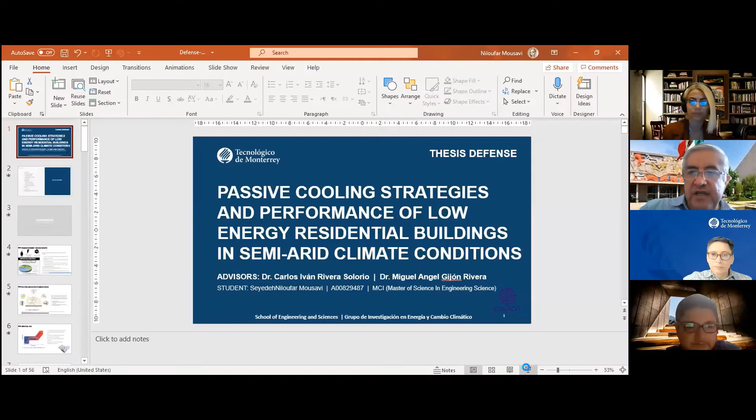Thank you, Doctor, for the introduction, and thank you everyone for joining our committee and giving me your precious time. I'm presenting my thesis defense for Master of Science in Engineering, MCI, at Tec de Monterrey. I would like to thank my advisors, Dr. Carlos Rivera and Dr. Miguel Gijón, for their guidance during these two years, and also Conacyt for supporting us. My thesis is about passive cooling strategies and performance of low energy residential buildings in semi-arid climate conditions.

In short, here is how we will present: first the introduction, covering the problem we face in this industry and what we want to solve. Then a brief literature review of previous works, the research opportunities and gaps found, and the objective of this thesis. Next is the methodology, including the general work plan, how we validated our simulation, and our case studies. Finally, we move into results, conclusions, and recommendations for future work.

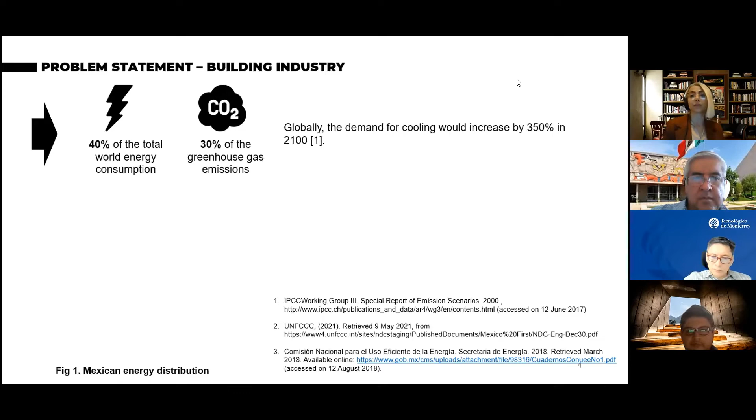In the introduction, I'd like to state the problem in the building industry. Globally, the building industry is responsible for 40% of total energy consumption and 30% of greenhouse gas emissions, due to both construction and consumption in buildings. Worse, this demand is projected to increase by 350% by 2100, because global warming will drive higher demand for cooling, making this problem even worse.

In the Mexican context, buildings are responsible for almost 20% of energy consumption, and out of that, almost half, 44%, is due to cooling. Another factor is that under the Paris Agreement, Mexico signed a goal to decrease greenhouse gas emissions by 22% and black carbon emissions by 51% by 2030. That's why reducing carbon impact and energy use is important across all industries, especially in building, which has a big portion of the impact.

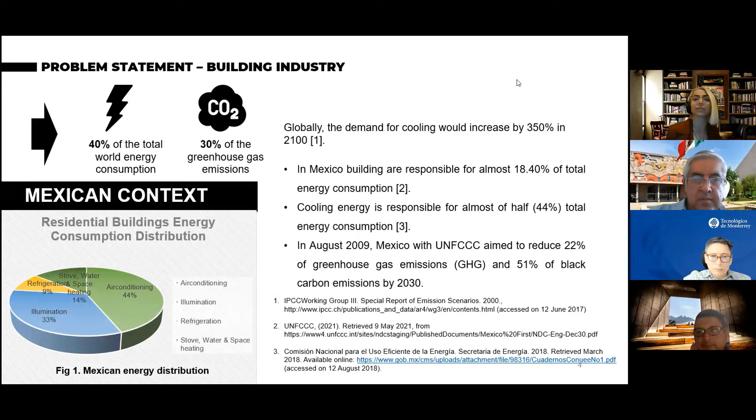Throughout history, there have been many passive cooling solutions that reduce the need for mechanical ventilation and electricity. One pioneer is the Passive House Association, which has suggestions and rules for different kinds of buildings. But passive cooling is very climate sensitive, so there isn't one strategy that applies to all; it needs to be studied in different climates.

Some solutions from Passive House include applying thermal insulation, certain types of window glazing that protect interior spaces, and airtightness. Other examples include reflective paint, thermal energy storage materials like PCM, insulation, glazing, and external shading.

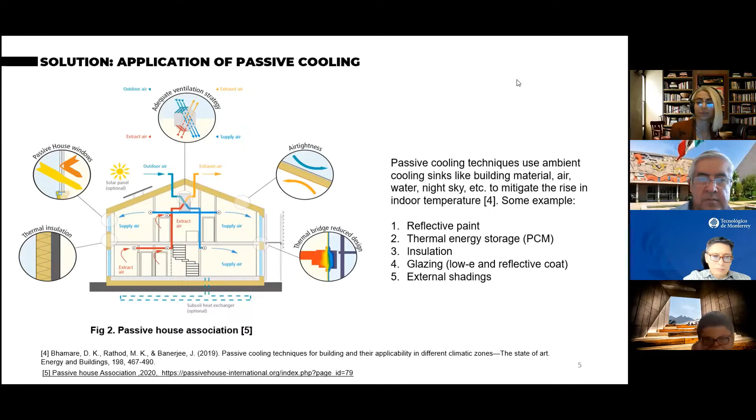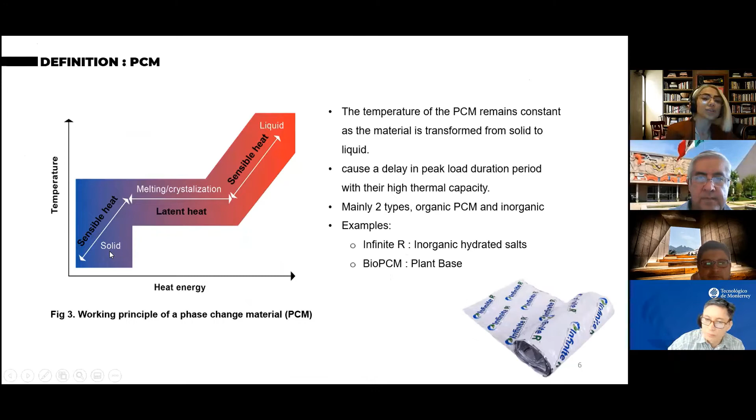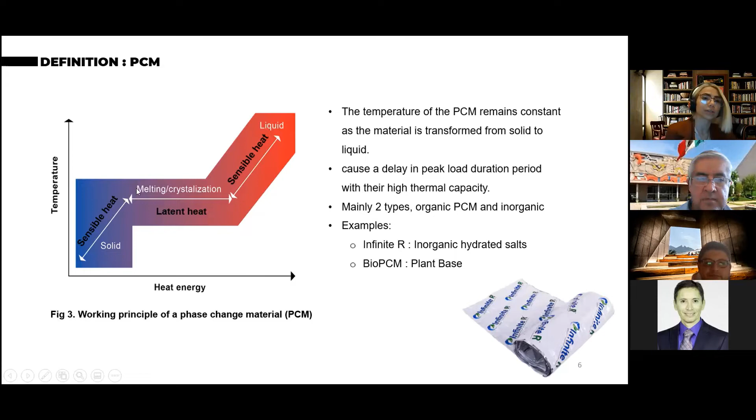To define some of the more advanced materials used for passive cooling, the first is PCM, a phase change material that keeps temperature constant between two states, transitioning from solid to liquid. As shown in figure 3, while temperature increases, it remains in solid form with sensible heat, but once it reaches its melting point, due to its latent heat, there's a larger energy gap before it starts changing state from solid to liquid.

Once the outside temperature reaches its melting point, the material starts to liquify, and when the temperature drops below the melting point, it starts to solidify and crystallize again. This creates a cycle that delays the peak load hours—for example, if the hottest hour is 3 p.m., it becomes 4 p.m.

In those spaces, there are generally two kinds of PCM: some are organic and some are inorganic. If I want to talk about the industrial ones available in the market, there are two main brands: Infinite R and BioPCM, where Infinite R is inorganic salt hydrate and BioPCM is plant-based.

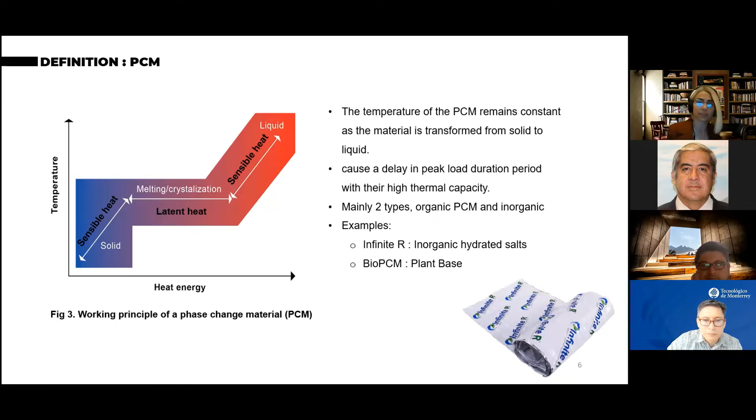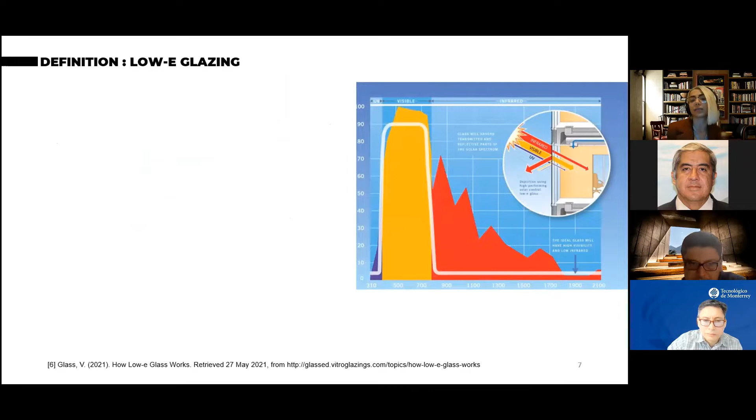Infinite R is right now more available in Mexico. Another new kind of technology is in glazing, which is low E. We know that generally there are three types of radiation: solar radiation, UV, visible, and infrared. Out of that, we don't want the UV and infrared, but we need the visible light to come in. So what low E glazing does is decrease the amount of radiation from UV and infrared, but allows the visible radiation in.

As you can see in the figure on the right, during a summer day, usually the low E glazing is applied in a double or triple kind of glazing. In double glazing, it's on the inner side of the surface, and on the outside. So once in the daytime it receives the solar radiation, it will reflect the ultraviolet and infrared, while allowing the visible light to pass through.

And during winter, what it does is it doesn't allow the heat inside the house to go outside, so it reflects it back inside, keeping the house warmer in winter and keeping the house cooler in summer.

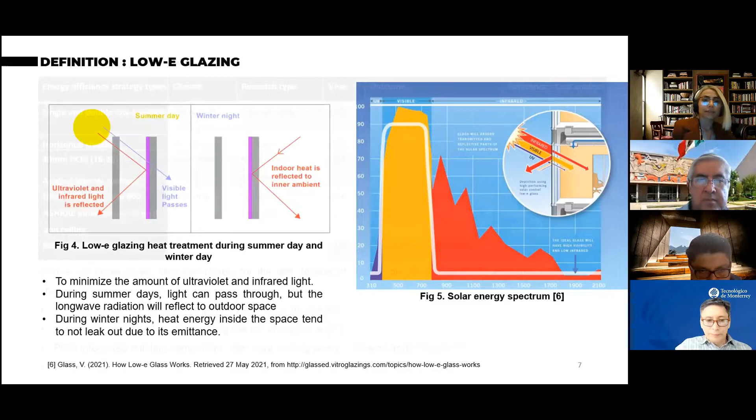Some of the literature review that we did, we studied more than 70 papers, but there is a short summary of a few examples of different strategies that were applied in similar climates, which is hot and warm, because they have been studied in different kinds of climates. They have used different methods, whether simulation or experimental.

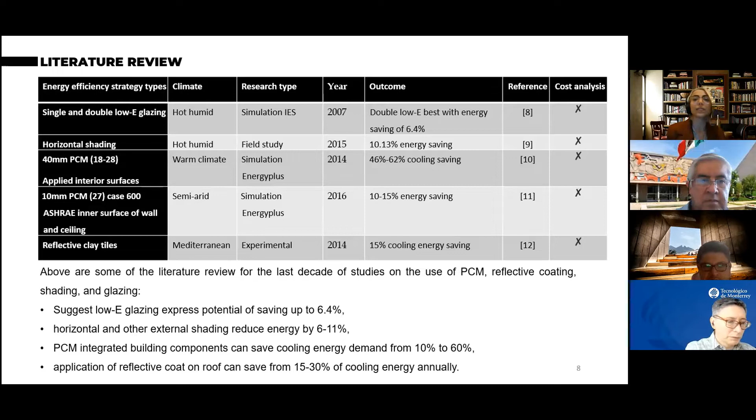One thing that they had in common is how much energy they saved, or cooling energy they saved. For example, by applying low E glazing, they found there could be a 6.4% energy saving in the building, or by applying shading, 10% energy saving. Something they were missing is there was no cost analysis on how much they save based on cost.

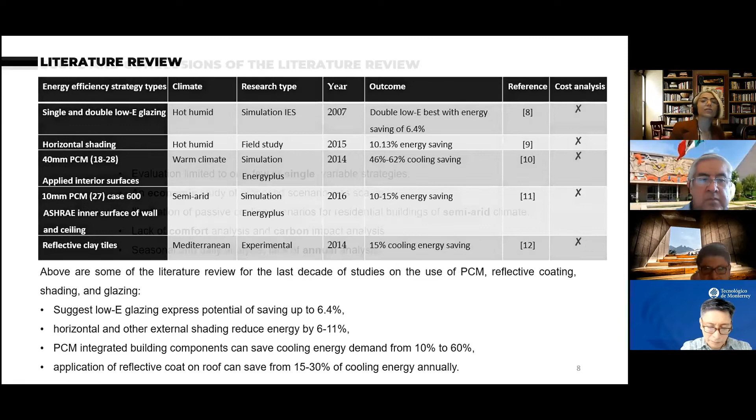Then we come to a conclusion on the gaps and things that were missing in all those studies. One of them is that they are mostly limited to single or a few kinds of scenarios, for example only low E glazing, or low E and reflective, but they don't combine the scenarios to see the impact of how it will affect the building.

Also, one thing that was missing was the economical study, which I think is very important. We know all the passive strategies, but they're not applied, because for the investors and users it's very important to understand the economic benefit for them, how much of the cost they can return and how much they can earn from this investment. So this was the important thing we think is missing and we can do about it.

Also, we saw that it's very climate sensitive, and passive cooling in semi-arid climate was missing. Also in all those studies, they either call energy reduction or just cooling energy reduction, but there is a lack in analyzing the comfort analysis - how it impacts comfort for occupants, or how much carbon they will reduce.

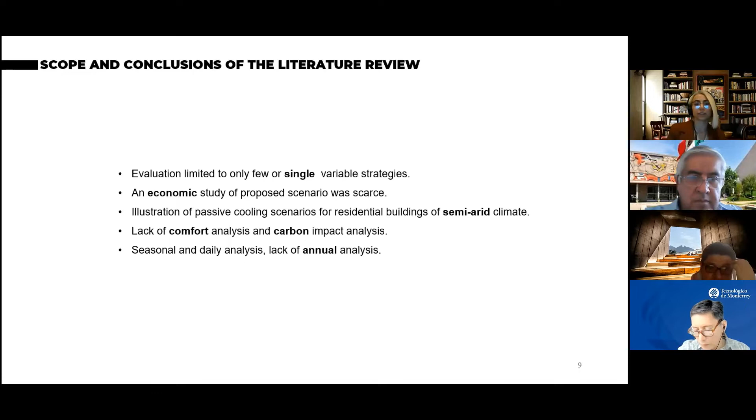Another thing is that some of them are seasonal analysis, meaning they only analyze heating or cooling energy, whereas if they don't do an annual analysis, sometimes there may be a decrease in energy consumption during summer, but in winter it increases energy consumption, and then the strategy is not applicable. So that's why we think it needs to be annual strategies - those are the gaps we want to cover in our thesis.

So the main objective of our thesis is to assist building developers and authorities with the economical and environmental impact of applying energy efficient configurations for passive cooling in residential houses in Mexico, which also provide thermal comfort for residents, and are cost effective, which is very important. We also want to assess the thermal performance and carbon footprint of these scenarios.

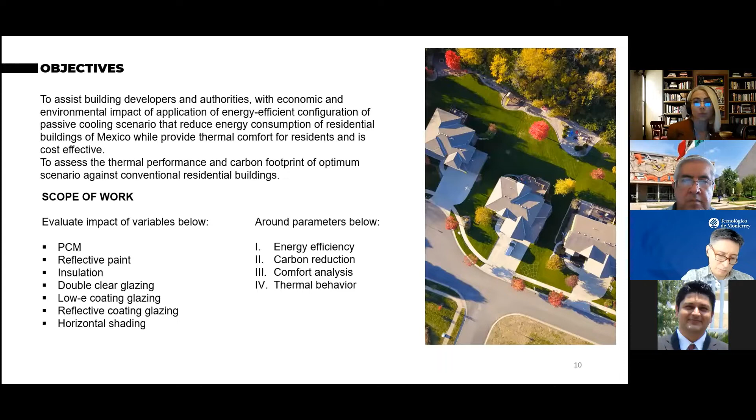The scope of this work, with regard to the literature we reviewed and the strategies available in Mexico, selected variables including PCM, reflective paint, insulation, double clear glazing, low-E coating glazing, reflective coating, and horizontal shading. We wanted to analyze these variables around energy efficiency, carbon reduction, comfort analysis, and thermal behavior. The methodology used in this study is mostly numerical through simulation, but we also tried to validate it through experimental methods.

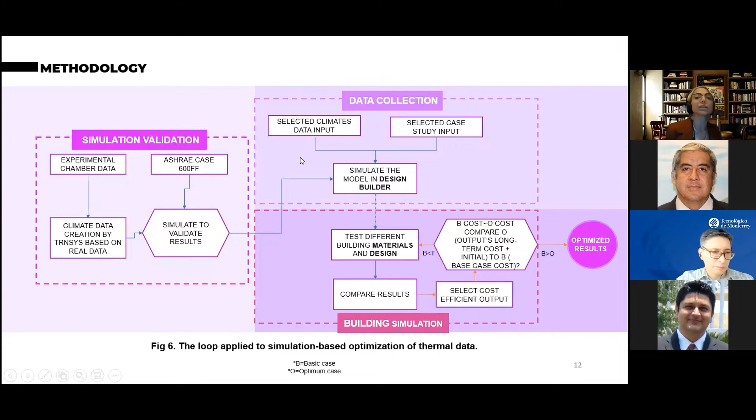In summary, we have three main stages. The first is data collection, where we want to select the most important climates within Mexico, and also find the common houses and select case studies. But in parallel, before simulating those buildings, we want to understand whether our simulation is verified.

We selected two types of validation: one through the benchmark ASHRAE case 600FF, and another through an experimental chamber we had near Tec, where we tried to re-simulate the real data and the benchmark.

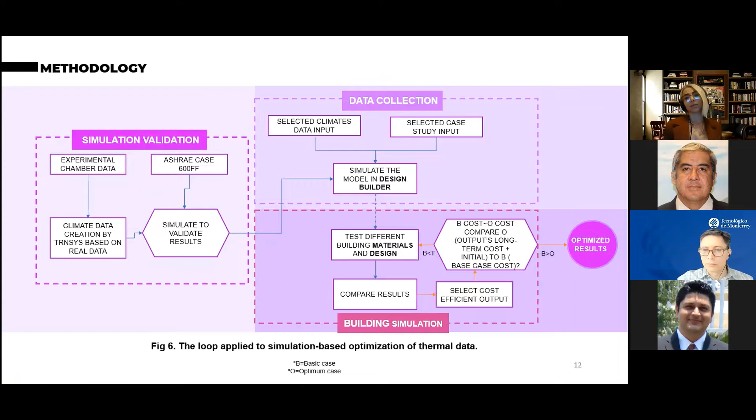Once we saw that our results and the other results synced and were verified, we simulated our case studies in Design Builder as a base case, then tried different scenarios for the materials mentioned above, comparing results in terms of cost and energy. If the cost and energy of the base case was more than the optimum case, we would resimulate until we got the optimum result.

The main software used in this research was Design Builder with EnergyPlus simulation, to understand the energy, comfort, and thermal performance.

For us to resimulate the weather data for the experimental chamber, we needed to use TRNSYS, because the data we collected was global and we needed to have diffuse and direct radiation. We used TRNSYS to analyze that.

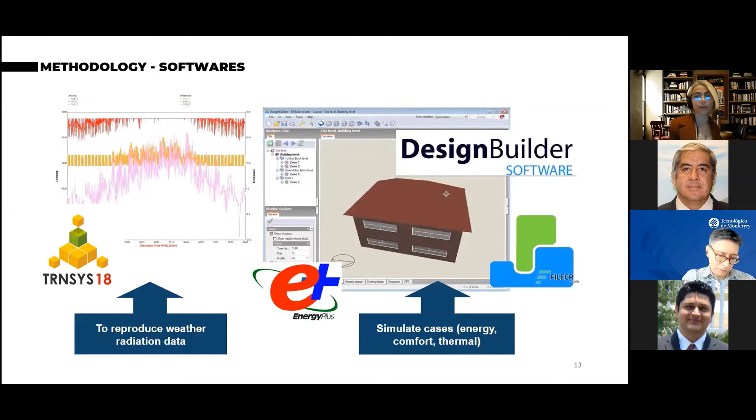Our first validation was through the 600FF, which is the BESTEST ASHRAE free-float test case. This was a very simple geometry, a 6 by 8 meter square house with 2 windows. We compared the maximum, minimum, and average temperature in the year, and had an error rate of almost zero, only 1%, which was verified through this benchmark.

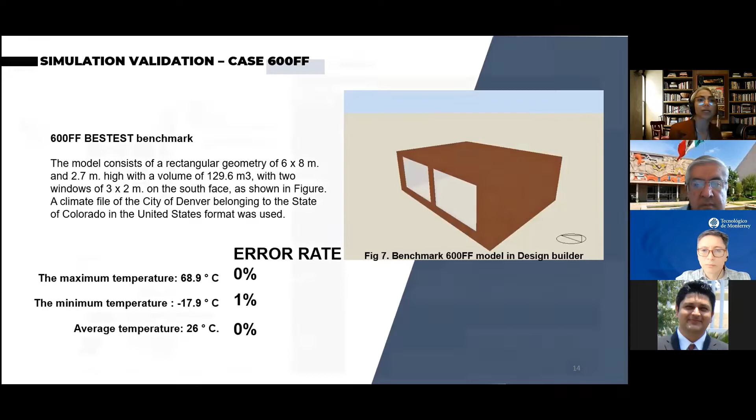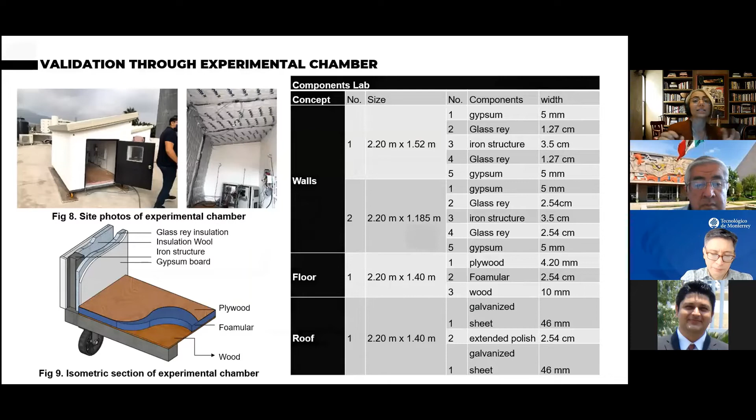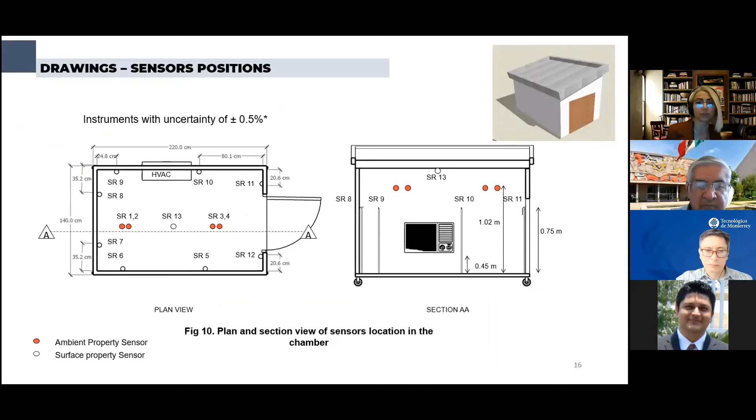Then we moved on to simulating the real data from our experimental chamber, a small unit near Tec, 2.2 by 1.4 meters square. We had sensors inside, and also a weather station to record the weather data, including ambient temperature, humidity, and surface temperature. We then tried to simulate that chamber and compare our results.

For the error, we used root mean square error and root mean square percentage error, based on which we only had 1% error. This was allowed because our Davis equipment used for the weather data had an error rate of plus or minus 0.5%. So 1% was acceptable, and we confirmed our simulation methodology.

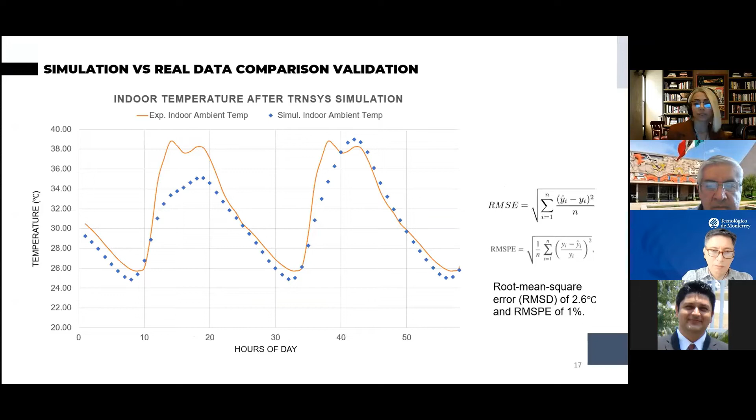The first step was selecting the climate. We looked at which states of Mexico have the highest cooling energy consumption, and saw that Nuevo León is number 2, one of the highest in terms of cooling energy consumption. That's why we selected Nuevo León.

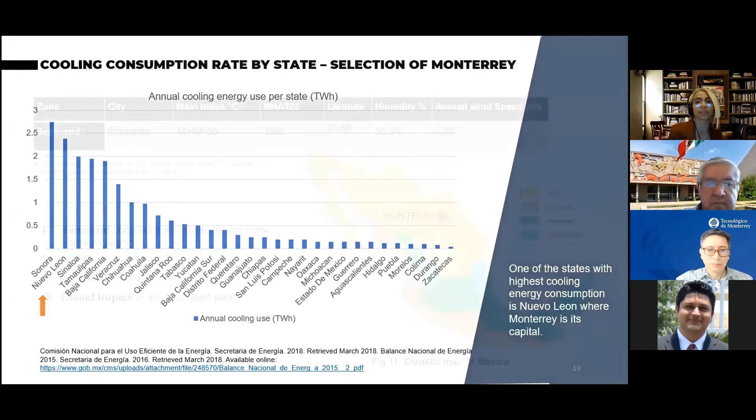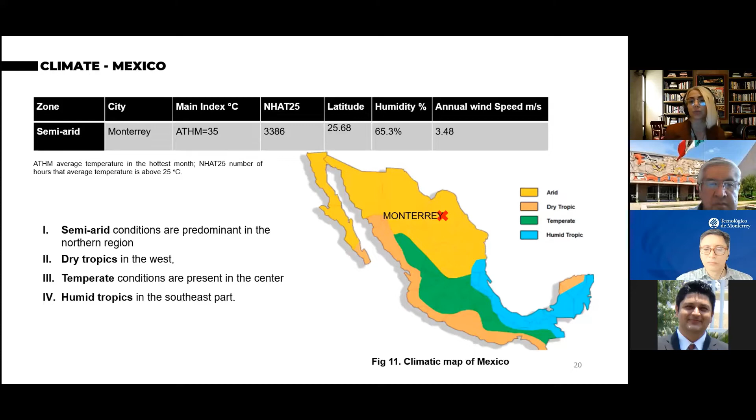We then analyzed its impact. Mexico has a few main climates, 4 main ones. Monterrey is in a semi-arid climate, while most of Mexico has an arid climate. Monterrey's average temperature for the hottest months is 35 degrees, and the number of hours the temperature is above 25 degrees is 3,386, almost half the year. The latitude is 25, humidity level is 65%, and average air speed is 3.4.

After selecting our climate, we wanted to find the common residential houses in Mexico. We went to the RUV website, a Mexican housing government body, to see how they classify residential units. We saw that they classify units based on people's annual average wage, and we also looked at the housing classes.

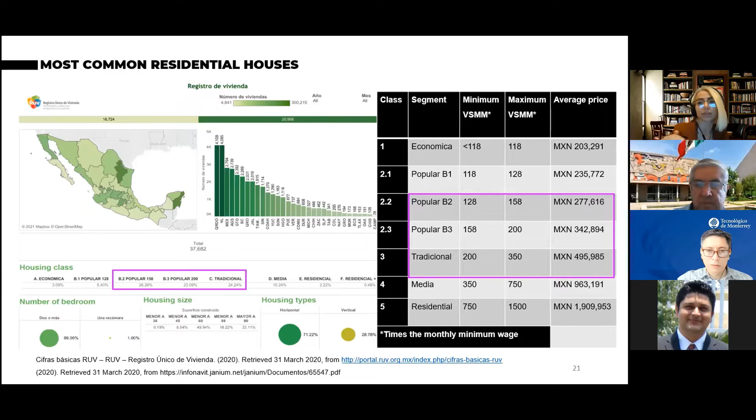Based on these three types, we know that B2 is a bit cheaper construction, and then B3 and traditional increase in their construction cost. So when we want to define our buildings, we try to find the most common type of construction in Mexico, and also cover almost all kinds of available houses in Mexico.

So for B2, which was the cheapest, it's a single story house, which we call case 1. It's only 36 square meters. We also want to analyze the apartment in Mexico because it's less common, but it's still common.

It's an apartment unit which is 4-story. For the traditional case 3, it's a double-story house. We are considering the whole double story as one house.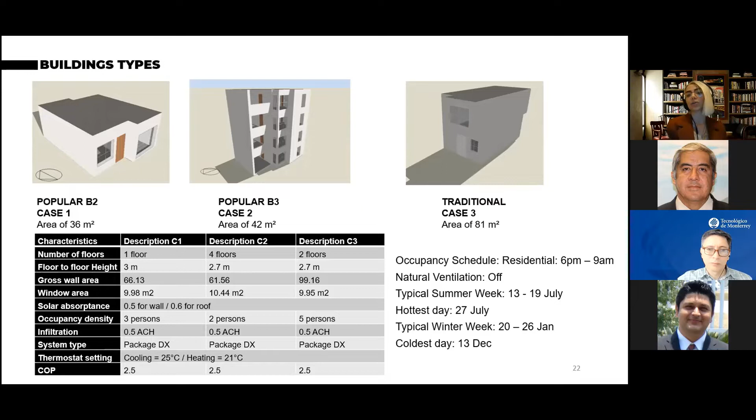For the systems of air conditioning, we are using package DX. For our cooling set points, we have 25, and heating is 21. For occupancy schedule, because it's a residential house, during weekdays it's 6 p.m. to 9 a.m., and on weekends it's 24 hours.

We also have a typical summer week from 13 to 19 July, and our hottest day is 27 July. Typical winter is 20 to 26 January, and the coldest day is 13 December.

So a few assumptions before we go into the simulation: in this study, we only consider one type of climate among the main climates of Mexico, because of time constraints. Also, for the apartment building, it's 4-story, but we are only analyzing the top floor, which is the most extreme case, receiving the most amount of radiation.

For orientation of all the buildings, since there could be many orientations, we are considering the most extreme, which is all the main facades and windows facing east-west.

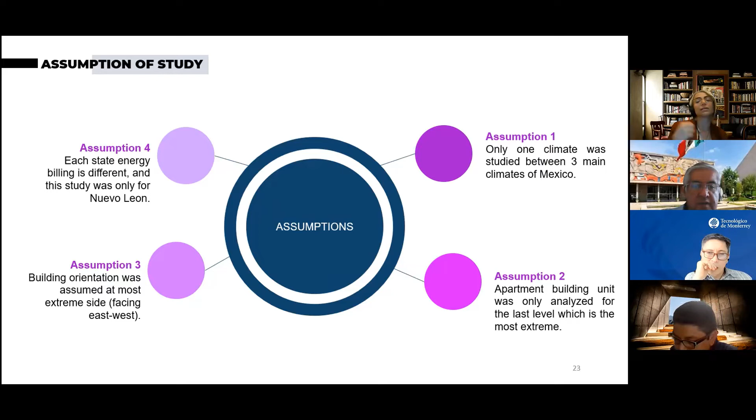And also the last assumption is that in Mexico, each state has a different billing tariff, and we are only considering the tariff for Nuevo Leon.

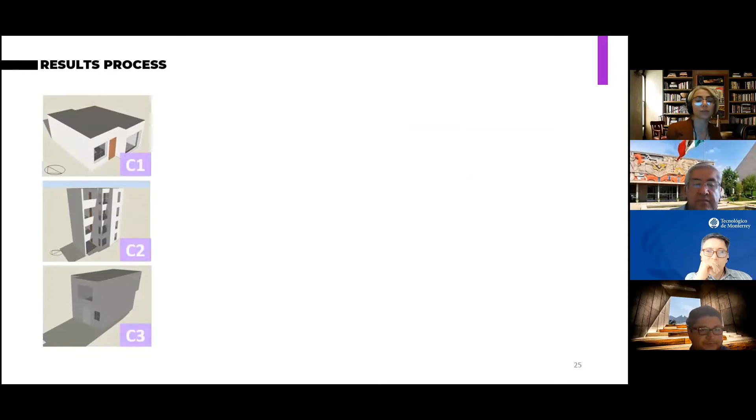Moving on to the simulation results and analysis, we have our results process. Just to simplify it: we have 3 cases, C1, C2, and C3, and we are considering that the building envelope consists of 3 main components.

One is wall, roof, and the openings. So we simulate and optimize each building component separately: wall separately with the rest as basic, roof separately, and opening separately. We choose the most efficient scenario for each component.

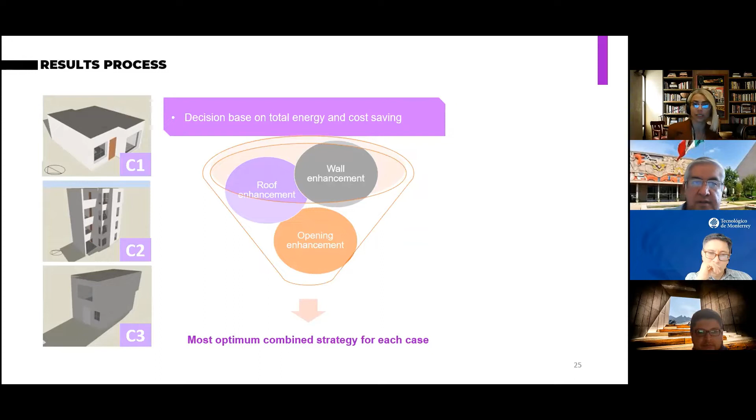This selection is based on total energy and cost saving, whichever scenario is most efficient in terms of both. Then the most optimum of each building envelope is mixed together for each case, giving us the most optimum combined strategy for case 1, case 2, and case 3.

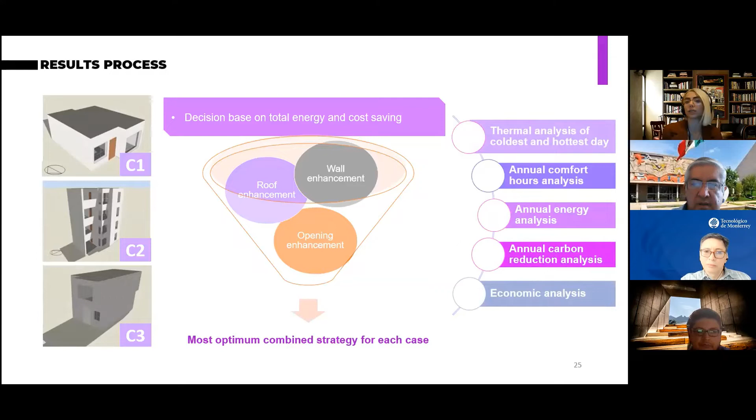Once we have those optimum scenarios, we analyze 5 parameters: thermal analysis of the coldest day and hottest day, comfort hours, energy analysis, annual carbon reduction, and lastly economic analysis of how it benefits the users.

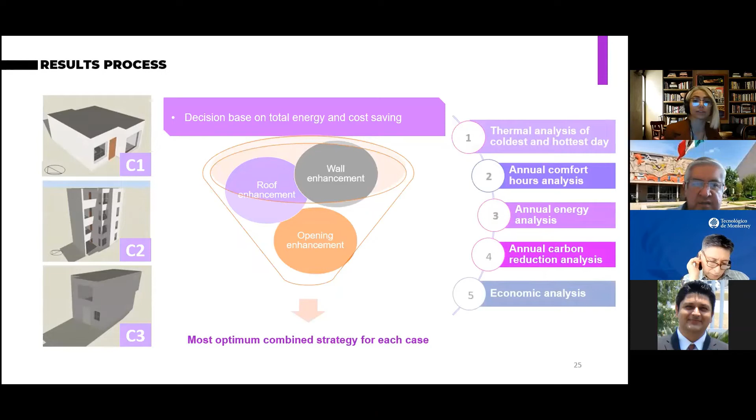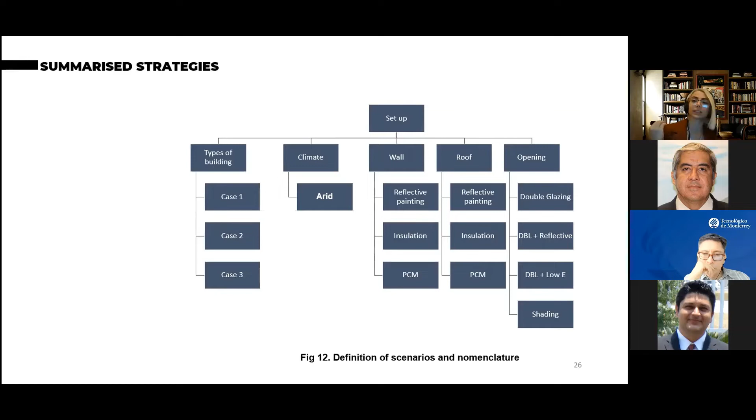To summarize, there are 3 cases, 1 climate (arid climate). We have wall, roof, and window. For wall, we selected reflective painting, insulation, and PCM. For roof, it's the same materials. For opening, it's double glazing with reflective paint, double glazing with low-e, and shading.

We made a short form to explain it since there would be a lot of words, so here is the nomenclature. For wall, we use PCM, insulation, and reflective paint, but we can also combine the scenarios.

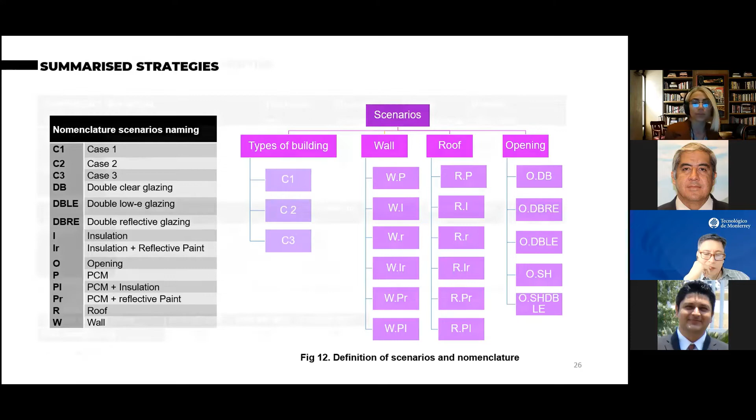For the thermal properties of all the materials, for reflective paint, we put the thickness at 0.005. Thermal absorptance of most of them is 0.9.

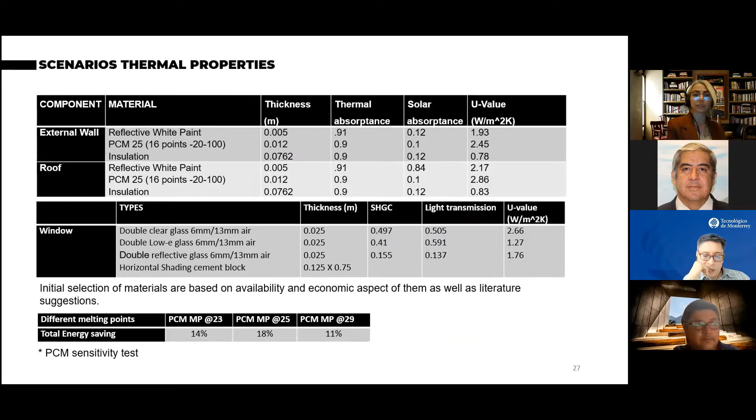For the PCM only, we needed to do a sensitivity analysis, because PCMs are available in different melting points depending on the climate condition, so you have to select the best one. For Infinite R, which we used in this study and is only available in Mexico, they have melting points at 23, 25, and 29. We tried to simulate all and see how much annually they save energy, and we saw PCM 25 outperform the others. So that's why we used PCM 25 in this study, with a thickness of 0.012, which is only 1 centimeter, whereas insulation has a thickness of 0.07, which is 7 centimeters.

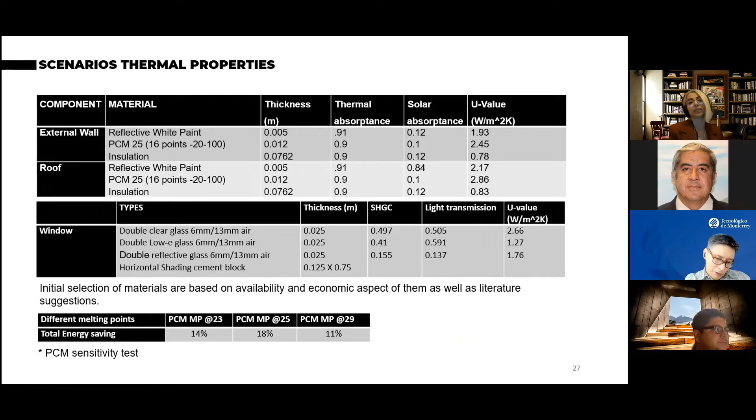For the roof, it was the same material. For windows, we have double clear glass, which is 6mm glass with a 13mm air gap. It's the same way for low-E and reflective, it's just that they have the coating on the inside wall. And for the horizontal shading, it's just the external horizontal block of cement.

Also consider that all the cases - this is just case 1 as an example - but all the cases are facing east-west facade, so they are receiving the most amount of radiation.

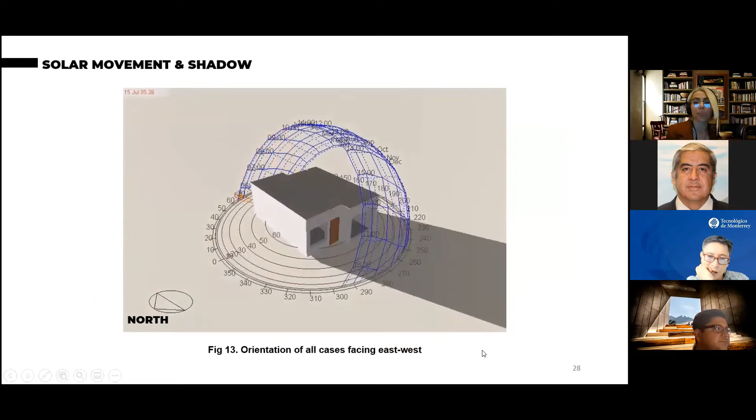Moving to selection of the best scenarios. To select the best scenarios, first we look at how much is the base case energy consumption and how the distribution is for cooling versus heating. Almost 60% of energy is for cooling, whereas for case 2 and case 3, cooling energy is more responsible than heating energy.

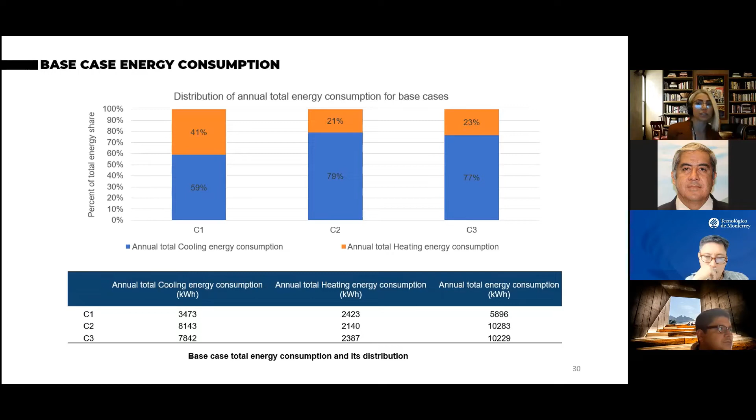Then we move into selection of the most optimum wall based on annual energy consumption. On the left side you can see total cooling energy reduction, and below is total heating energy reduction, per all the scenarios - we have 6 scenarios for wall. For example, if we look at only cooling energy reduction, wall with PCM and reflective paint outperformed, and you can see for case 1, 2, 3 they follow the same pattern.

When we look at the heating energy, PCM with insulation outperformed the others, and this is because reflective paint reflects all the radiation - it won't allow the space to absorb radiation. So during winter, when you don't absorb the little heat the sun has, your space becomes cooler, so you don't have much saving in terms of heating. You need more energy to heat your building.

Whereas for summertime, reflective paint doesn't allow the excess heat to come in, and you save more on the cooling side. What we cared about was the total, because sometimes if we save in summer but lose in winter, there's no point. So looking at total energy saving, we saw that wall with PCM and insulation outperformed others, with the highest percentage in all cases 1, 2, 3, same pattern, followed by insulation with reflective paint with a little bit of difference. So first is PCM with insulation, then insulation with reflective paint.

Going to improving the roof - when we applied the same scenarios for the roof only, we saw the same pattern repeating. For cooling, PCM with reflective paint outperformed others, whereas for heating energy, PCM with insulation, and again in total PCM with insulation outperformed others, followed by insulation with reflective paint, which is close - for example 25% and 23%.

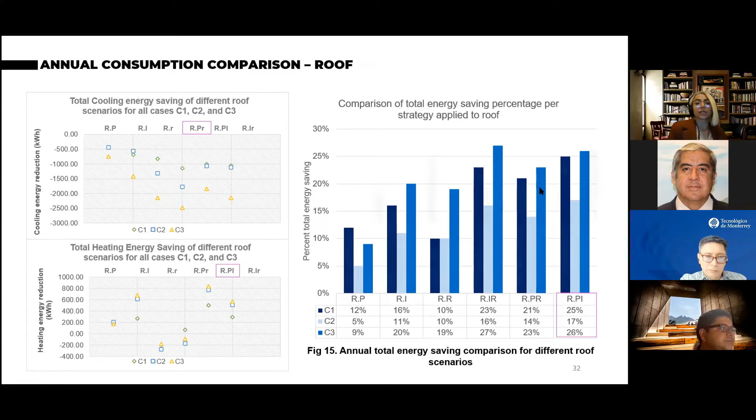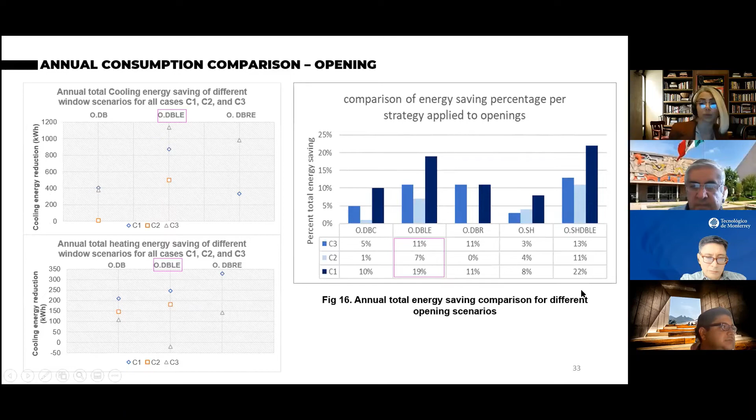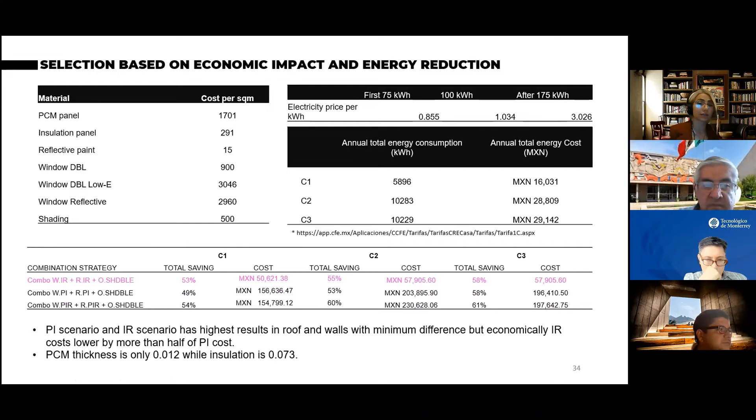And then we try to look at the cost. For example, if we have the PCM with insulation, the cost for case 1 is 150,000, whereas if we have insulation with reflective paint, the cost is only 50,000, so it's almost one-third. For all the other cases it's more than that. So based on the cost and economical value, we see that insulation with reflective paint is more valuable.

But another thing that got us thinking was that the PCM was a good scenario, but due to its cost we didn't select it. But also the thickness—insulation has a thickness of 7 centimeters, whereas PCM has only 1 centimeter.

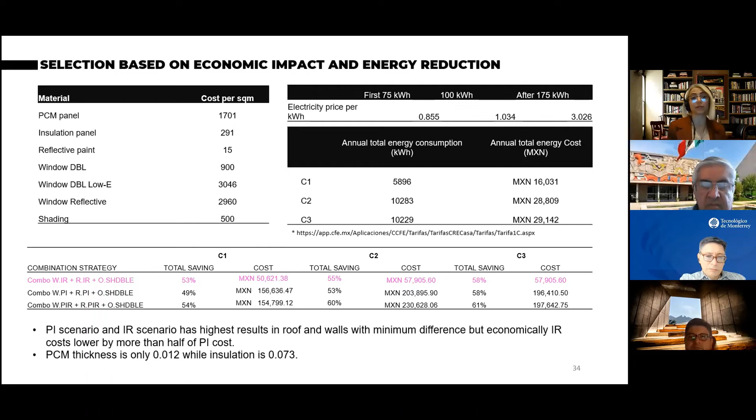So we also did another sensitivity test for the PCM thickness, trying to have a similar thickness as insulation. So PCM 25 with 7 centimeters of thickness could save up to 57%, as insulation is only 42%, and 57% for case 1 compared to a combined strategy of 53%.

So actually PCM could be much more effective than all the other strategies if it was more economical, and also if it was provided thicker in the industry, because right now it's only available in 1.2 cm increments, and if you want 7 layers, of course it's very expensive. So there's a potential here that we detected.

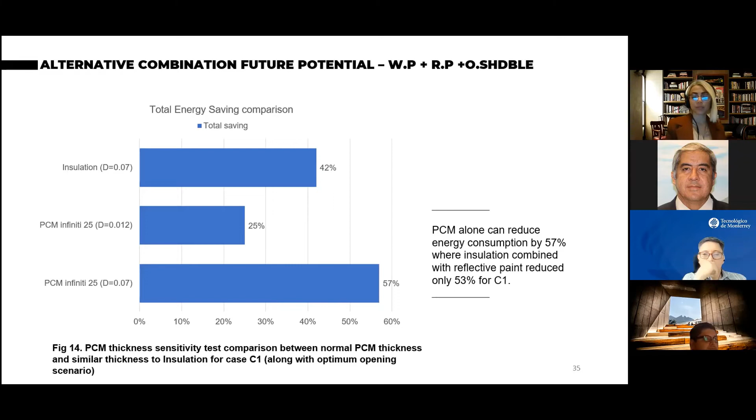So now we selected our optimum wall strategy, roof strategy, and window strategy. Then we want to combine them and also understand the impact of the energy efficient configuration cases.

The first thing we want to analyze is comfort and thermal analysis. To understand this, we can't have an average for the whole house because it's very zone based. We have to analyze per zone, so we try to select one zone and see the most critical zone, and how this configuration impacts it.

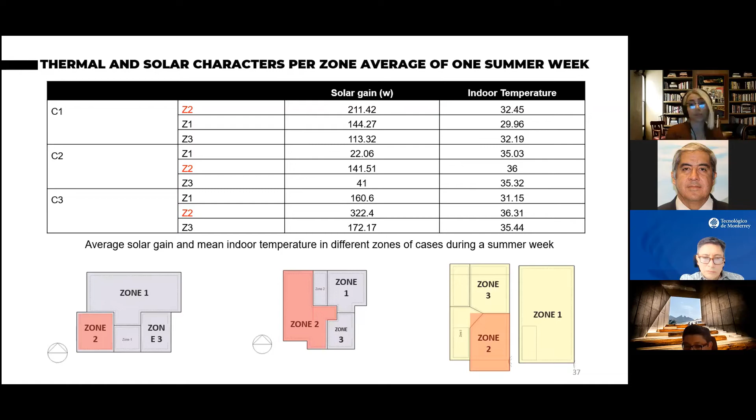For the selection, we look at the solar gain during the summer week, which is more critical. We saw that zone 2 in all the cases was most critical. Looking at the floor plan of, for example, case 1, we can see that zone 2 is protruding out, so it's receiving more radiation. For case 2, zone 2 is bigger and has more openings and windows, so it's also receiving more radiation. There's an explanation why it's more critical, but we selected zone 2.

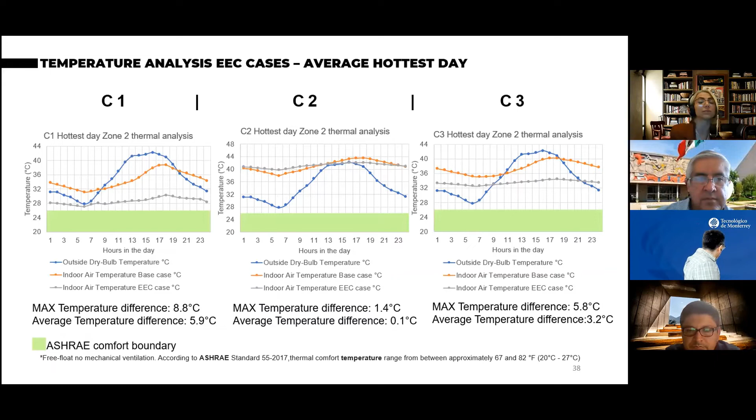Also looking at the comfort area, none of them drop into the comfort hours, so there is still a need for mechanical systems during the hottest day—but keep in mind this is only the hottest day of the year.

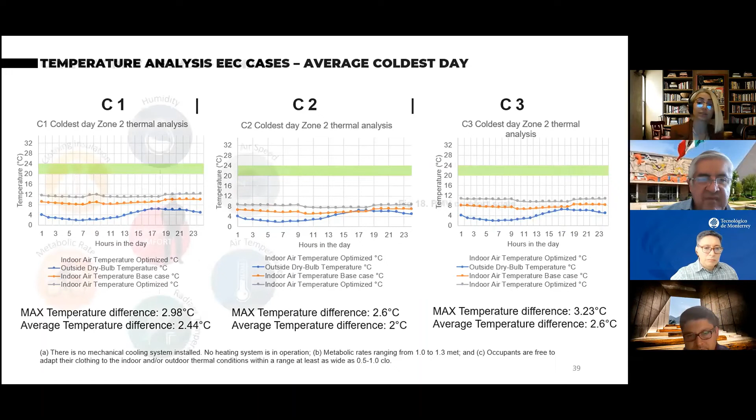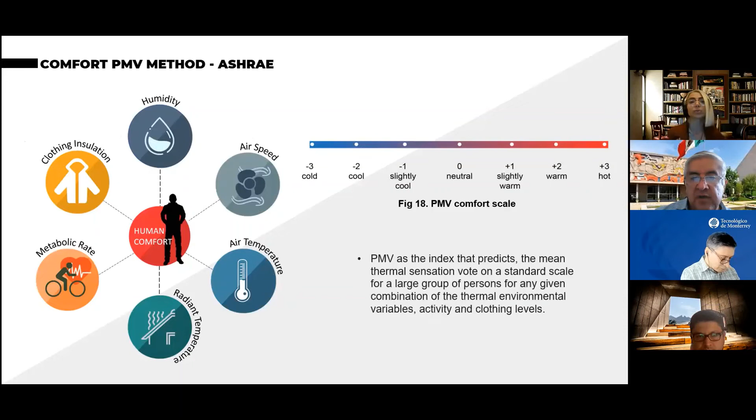Then we want to look at how much this impacts the comfort area. For comfort, we use the PMV method, founded in the 1970s by P.O. Fanger. This PMV method isn't just temperature—the formula also considers humidity, air speed, and radiant temperature, as well as the human's metabolic rate and clothing insulation.

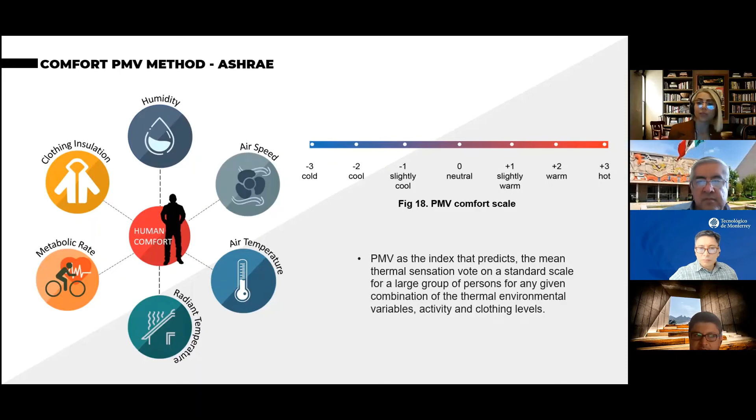He tried to have a rating between -3 to +3, whereas 0 is the neutral. From -1 to +1 was the neutral level of comfort. We tried to simulate our zone 2 spaces to see how many hours of comfort we have in the base case and in the optimum case.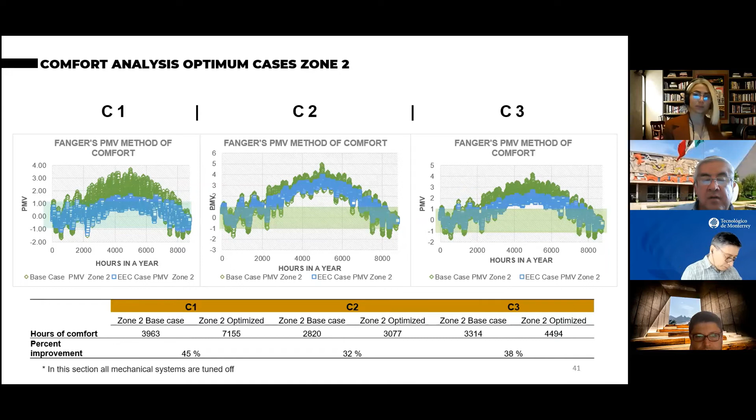For case 1, we see that of all the green dots, the blue dots fall a lot within the bars of comfort, whereas in case 2 and case 3, fewer dots are within the comfort zone. Case 2 shows less improvement. Looking at the numbers, for zone 2 in case 1, we have 45%, almost half, improvement in comfort. For case 2 and 3, we have 32% and 38% improvement in terms of hours.

Now we move into seeing the impact of our optimum case in terms of energy, how much energy we are saving. On top, we can see that for wall and roof, we have reflective paint insulation. For openings, we have low-E glazing and shading. Below, we see the construction detail of how it's built for the roof, the wall, and the windows.

Looking at the figure, we can see the annual energy consumption of the base case and the optimum case. The blue color shows the base case cooling energy consumption, and the orange shows the optimum case cooling energy consumption. We can see that it almost reduced by 1/3 for cooling energy consumption, and heating reduced by 1/4.

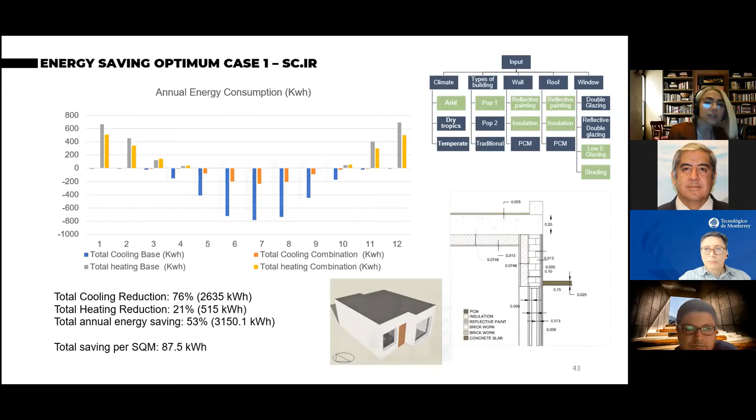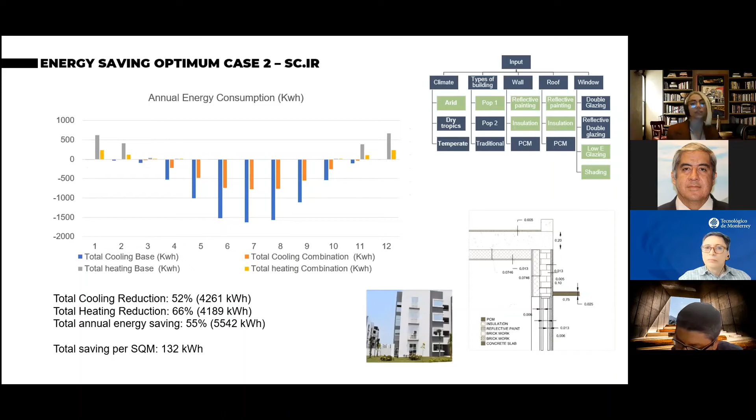Cooling reduction was 76% in total and heating 21%. However, for the total, we have almost half, 53% energy saving. Cooling energy reduction was more, but for case 2, we see that cooling reduction was 52% and heating was 66%. But on total annual energy saving, all had a similar saving of 55%, very close.

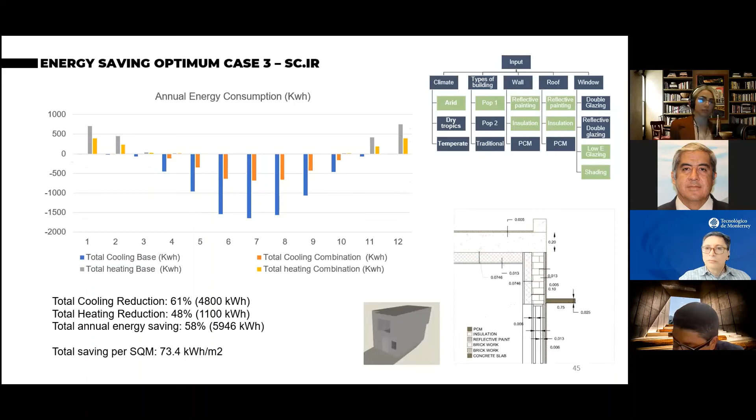For case 3, we see 60% saving in cooling, 48% saving in heating, and in total, in a year, we have a saving of 58% in the building. So they all have almost 53, 55, and 58% savings.

We want to translate that into how much emissions we are saving by reducing this much energy. Based on the Commission of Energy in Mexico during 2019, for every megawatt hour of electricity, 0.505 tons of carbon is emitted, which we want to calculate based on kilowatt hour. We have 0.505 kilogram of carbon per kilowatt hour.

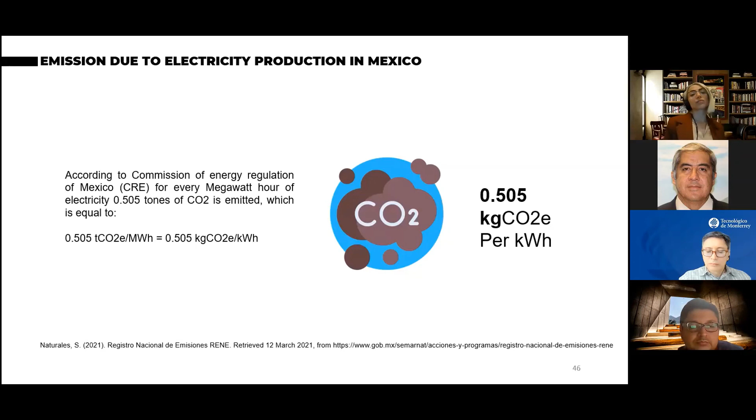Based on how much energy we save, for case 1 we save 1,580, almost 1,580 kilogram of carbon saved. For case 2, we see 2,800 kilogram of carbon, and almost 3,000 kilogram of carbon for one house.

If we translate it into how many trees we are planting if we save this much carbon, 75 trees work as 1,580 kilogram of carbon. So for just one house, we are planting this many trees. Imagine if we extrapolate it for the whole city, how many trees would we be planting? For case 2 it's 133, and for case 3 it's 142 trees.

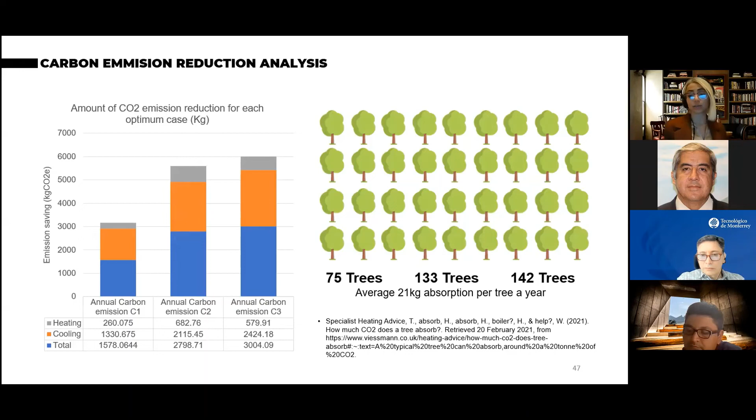Also, with regards to Mexico's total energy supply, one of the main contributors is oil, which is non-renewable in Mexico. So we want to translate that into how many barrels of oil we are saving every year for one house. For every barrel of oil, which is 42 gallons, for case 1 we are saving 2 barrels less. For case 2, 3.2 barrels, and for case 3, 3.5 barrels of oil less we are using for one house.

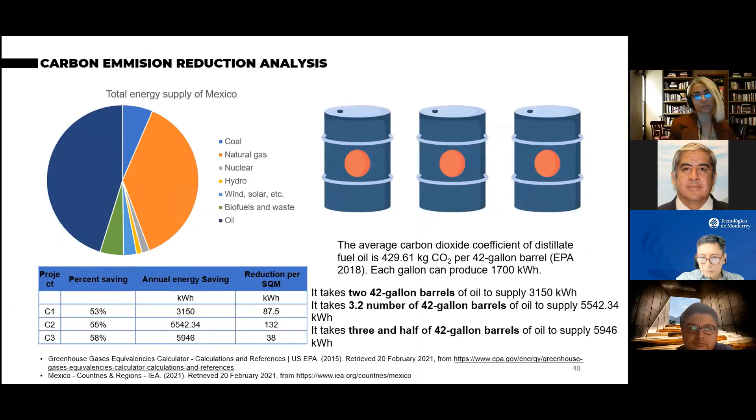At the end, we also analyze the cost for the users and investors to understand how much cost they have, when they get back their investment, and how much they are earning back. For case 1, we see that annual energy cost reduction is 8,500.

For case 2 and 3 it's more, because one is an apartment and the other is a double-story, bigger house. So it's 15,800 and 16,900. The material cost for almost all of them is around 50,000 Mexican pesos. The period of return for case 1, because it has a lower level of cost in terms of energy cost, will return in about 6 years.

For cases 2 and 3, in almost 3.5 years they will see a return on their investment. After that, they have a profit of almost 15,000 to 16,000 every year, so they are profiting after that. I think they have a motivation to apply such scenarios.

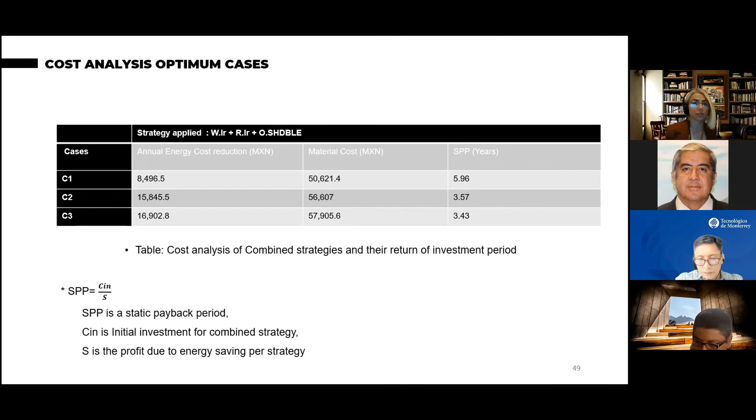In conclusion, for the wall scenarios we selected, we saw that PCM with insulation outperformed others, with 900, 1,700, and 1,400 kilowatt hours for case 1, 2, and 3. But with regards to our cost analysis, we saw that wall with insulation and reflective paint was...

more optimum. It saves energy a little bit less, for example from 900 to 810 kilowatt hours, but in terms of cost it's much more effective.

For the PCM, we found that because of its low thickness we saw a lower impact. But if we increase its thickness, for case 1 we can have an energy improvement of 57%, which is a lot, and also we could have a better cost for PCM.

For glazing, we saw that it's responsible for a higher amount of cost in the building envelope, and we saw that low-E glazing outperformed others, saving up to 22% for case 1, and 11% and 13% for cases 2 and 3.

Overall, we saw that it's desirable for all cases to have the same scenario for wall and roof: reflective paint with insulation, and for openings, low-E glazing with horizontal shading. We can save up to 53, 55, and 58% for cases 1 to 3, which is almost half for all cases.

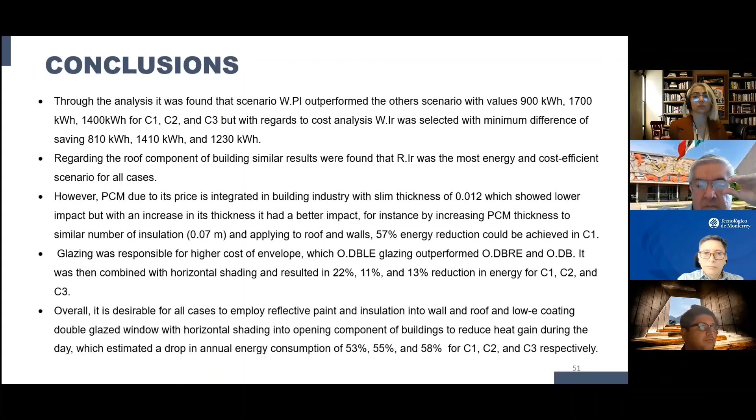We wanted to translate these parameters into a ratio of 1 to 10. Case 1 had the most amount of saving in terms of cooling energy.

Compared to heating, we saw that case 2 has the highest amount of saving.

In terms of carbon emission, since almost all of them were reduced to half of their consumption, they saw a similar amount of carbon reduction: about 1,500 kilograms for case 1, almost 2,800 for case 2, and 3,000 kilograms for case 3.

With regards to thermal performance, for case 1 and case 3 we saw a better improvement on the hottest day, whereas for case 2 we didn't see any improvement on the hottest day, maybe due to its altitude.

However, for the coldest day, we saw that all cases had a similar improvement of about 2 to 2.6 degrees Celsius. With regards to comfort, case 1 had the most improvement, by 45%, while the others were only 33% and 38%.

For the payback period, case 1 had the longest payback, almost 6 years, which is also because it has a lower demand for energy consumption. For cases 2 and 3, we saw periods of return of about 3.6 and 3.4 years, respectively.

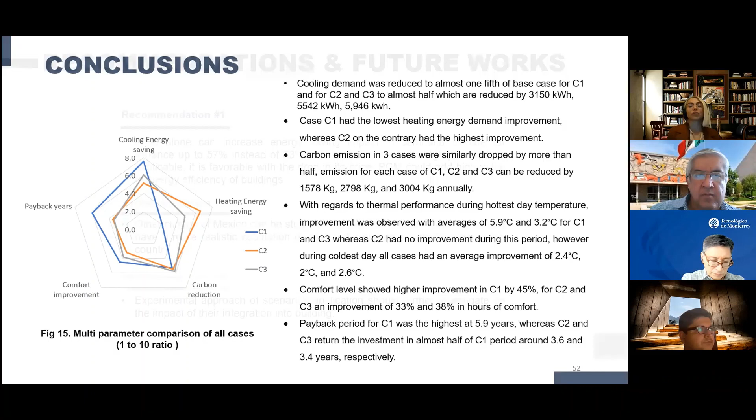Finally, what we recommend for future researchers is that PCM has a lot of potential, especially in semi-arid climates. We saw that if we increase its thickness, we could save up to 57% instead of 53%, using less material since it's not combined with other scenarios. But because of its high price it's less applicable right now, though it has high potential for the future if more is invested in it for energy efficiency.

Secondly, to extrapolate the results and understand how much the government could save across the whole of Mexico, future work could study other climates in Mexico to understand the cost and emission reduction for the whole country.

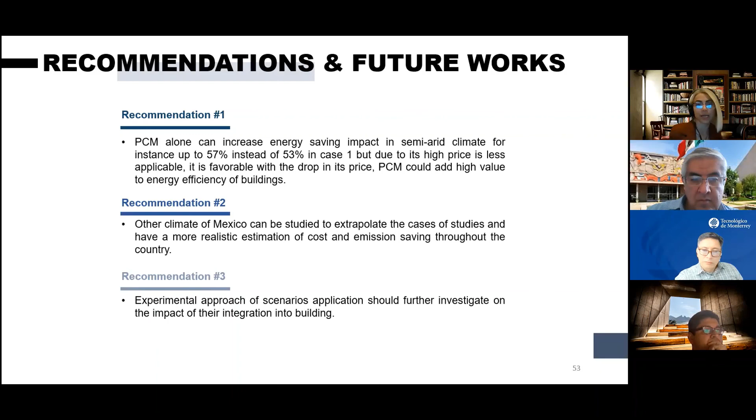We took a numerical approach and simulated these scenarios, so we think there could be an experimental approach investigating all the parameters we analyzed. So thank you so much for listening, and I'm here to answer your questions.